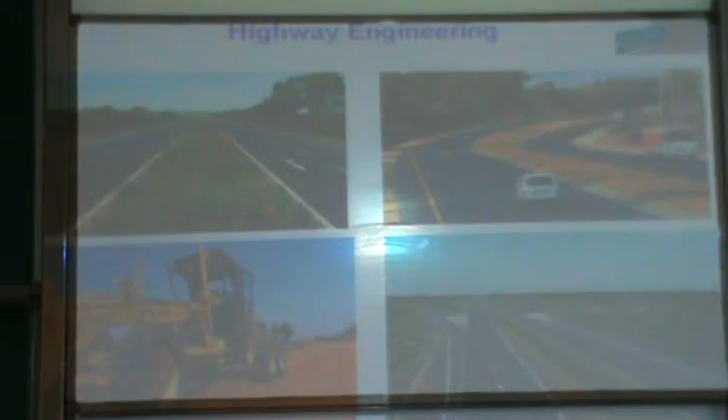So when you really look into reducing these road accidents, you can see that we can design highways as per international standards or our Indian Roads Congress standards. This picture shows a well-laid highway by our National Highway Authority of India. We can see that this highway is divided, a two-lane highway with dividers, and the divider needs a lot of horticulture work. When one goes through this highway, one can have a pleasant drive plus an accident-free journey.

Also you can see there are no cutting-in marks in between, so there is no chance for people to take a U-turn on this particular highway unless there is a designated U-turn. So this highway is a kind of civil engineering structure which ensures full safety on the roads. If you really look into this highway, it is already finished, but its horticulture aspect in the median is lacking, though it's still under development.

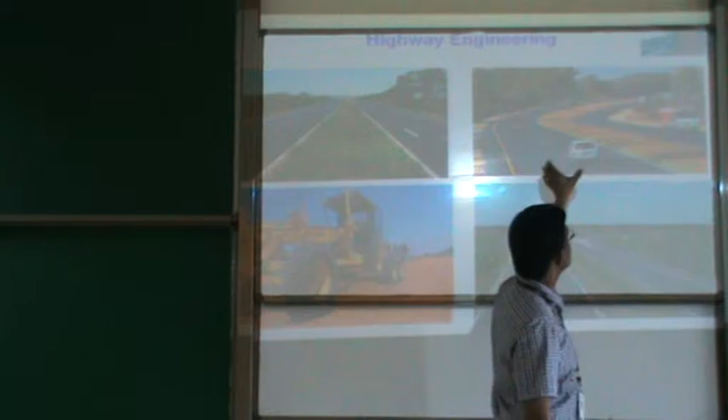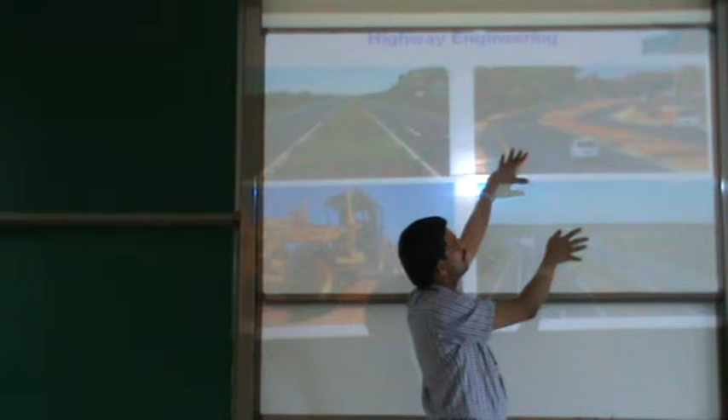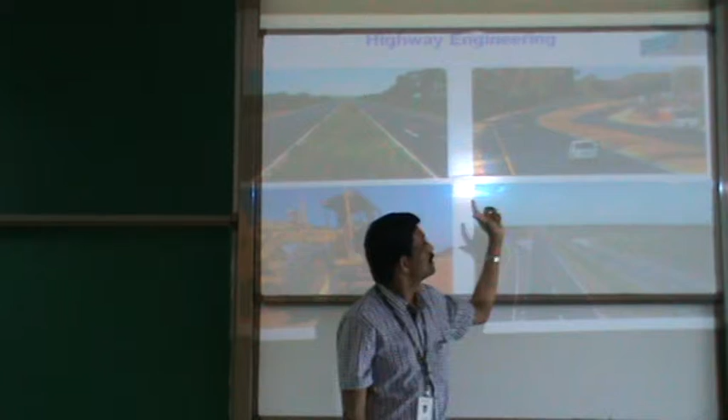But you see that the highway is taking a particular turn. There is a lot of science involved behind this turning, because when a vehicle takes a turn, it will be subject to centrifugal acceleration and the vehicle will be pulled away. So you need to design this curvature with banking on the roads, which you will deal with in detail in later classes. My scope in this particular lecture is just to introduce what aspects need to be thought about. In this curvature, the design depends upon the speed of the vehicle on this highway.

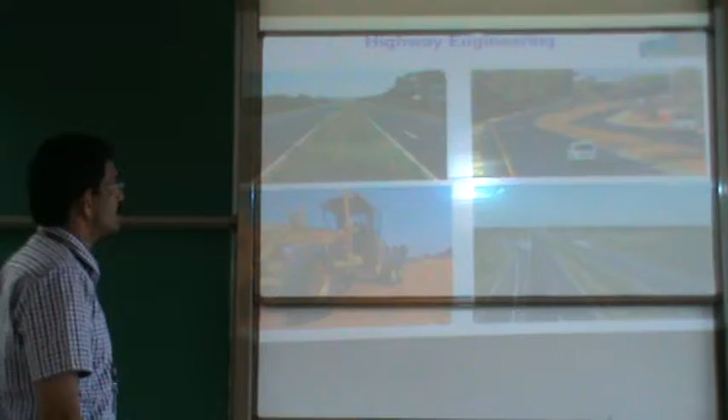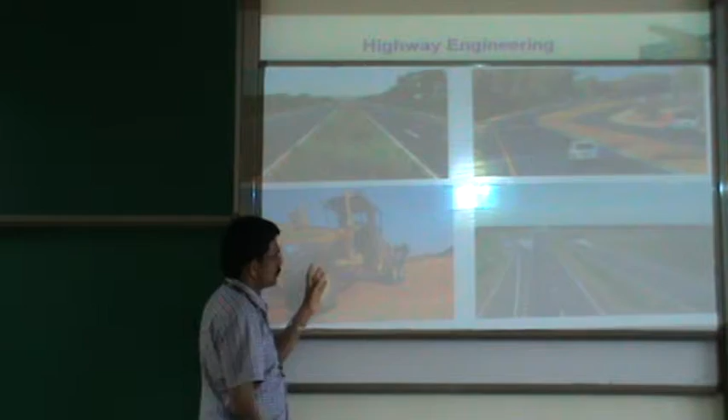The more the speed, the more radius of curvature you need, so that an accident-free negotiation of the curve is possible. If you look into this picture, it shows what kind of equipment is to be used, hired and employed with optimization, so that the highway project is constructed with a lot of economy and time saving involved. These are some of the aspects a highway engineer needs to focus on.

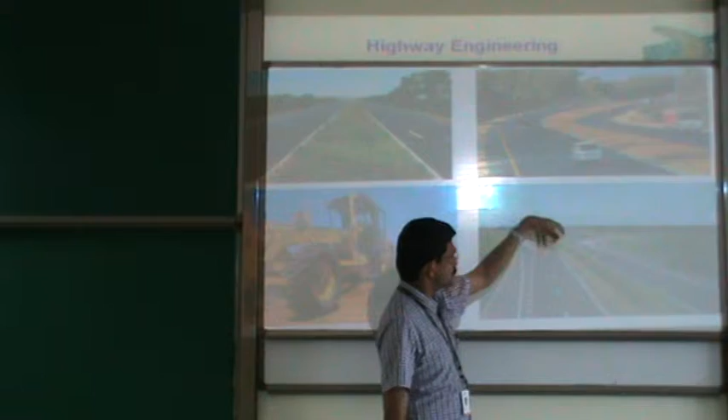Here is another finished highway. You can see that one highway is coming directly to this main highway, and another one is probably bifurcating. When you have such kind of diversions, how you design is very important. You need to have proper channelization, proper marking on the highway, and also you need to put street lights. The spacing of street lights is very, very important, because if the street lights are not properly laid out, that can also lead to accidents.

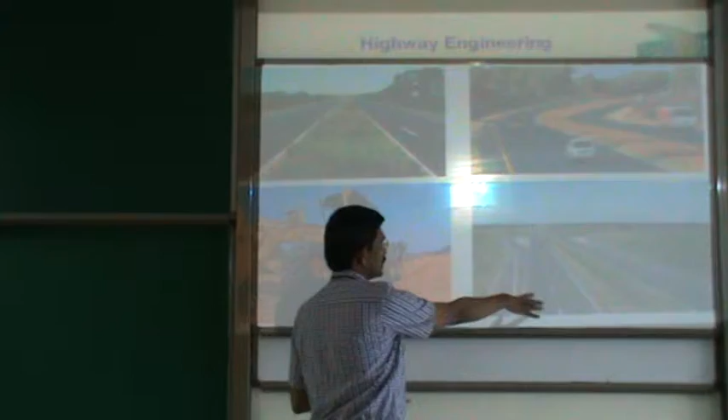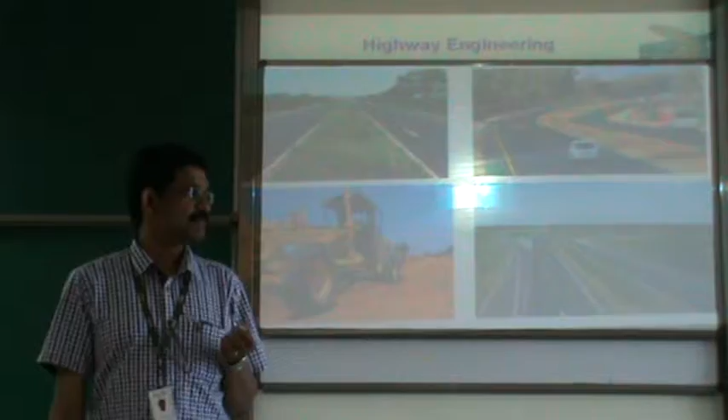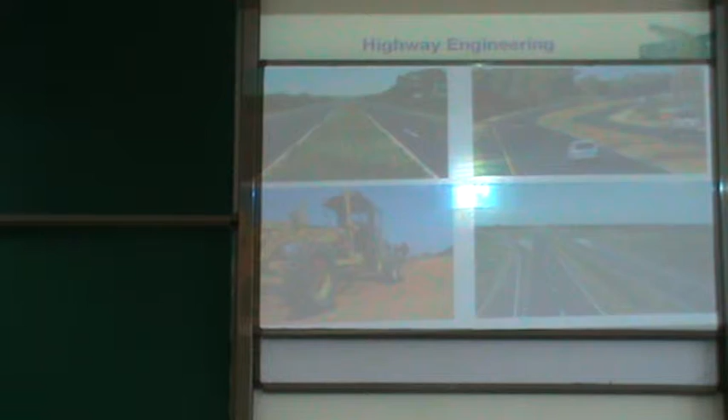The recent budget allocated around 70,000 crore investment to infrastructure. Some major part of this money is going to be used in the highway and transport sector. Investment is there right now, so engineers need to really work hard and make our highways and railways safe and comfortable for passengers to use.

Now this is a grade separator. We can really see when more number of junctions come at the same level, we can already experience a lot of traffic jams in day-to-day life. We can avoid such long queues of traffic jam by designing a proper grade separator. This is a very complex grade separator, but you can see free flow of traffic in all aspects, in every direction.

One advantage is that while avoiding such traffic jams, we save a lot of fuel and reduce pollution. Ultimately it will increase the health level because it avoids wastage, and people's health won't be affected since there's no idle condition for vehicles to stop at a junction and pollute more. So this kind of investment, when you look at life cycle analysis or long-term basis, brings a lot of goodness to society.

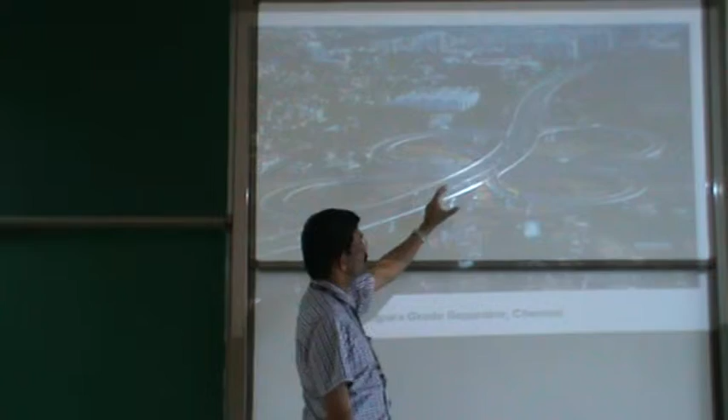In our locality, Chennai itself, you can see the Kathipara grade separator well laid out, and I witnessed how much traffic jam was there before the installation of this flower-shaped grade separator in Kathipara. Now you can see free flow of traffic. Chennai is considered one of the thickly populated cities, and you can see vehicles freely moving. Those who want to go to the airport also face absolutely no congestion. So this kind of structure is more and more easily deployed in highway engineering design, in many parts of our city or elsewhere.

This road paved density is very important for the development of that particular locality because connectivity is very important. If connectivity is more, industrial output would be more, agricultural output would be more, and healthiness would be more, because people can reach hospitals and other places easily if road connectivity is high. So there is a lot of scope for other states to improve road connectivity.

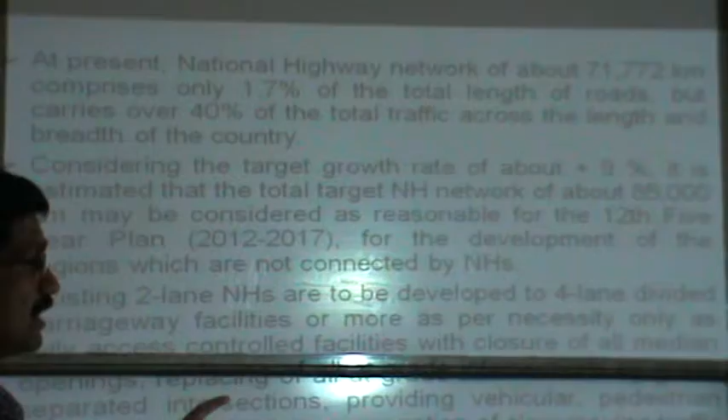Such national highways have to be there, and the percentage of length has to be increased. Considering the target growth rate of over 9% in our country, in the 5-year plan the government is anticipated to increase road length from around 71,000 to 85,000 kilometers. They also want to upgrade existing 2-lane national highways to 4-lane highways, and we need a good number of grade separations like Kathipara, along with proper pedestrian and cattle crossings, since most roads currently lack proper pedestrian traffic flow.

For pedestrians to travel comfortably and safely, we need to enhance the capacity of the road in such a way that vehicles can move very fast, while at the same time pedestrians can cross safely and walk on the side of the road safely. We also sometimes need to segregate slow moving traffic by providing service roads or alternative connectivity wherever required.

These measures are all from a road safety point of view, so that deaths on roads go down substantially, because India is at the forefront of accidental deaths happening on highways. We need to reduce this substantially. So civil engineers, especially those specialized in highway and transportation engineering, need to play an active role to realize this dream so that our death toll goes down.

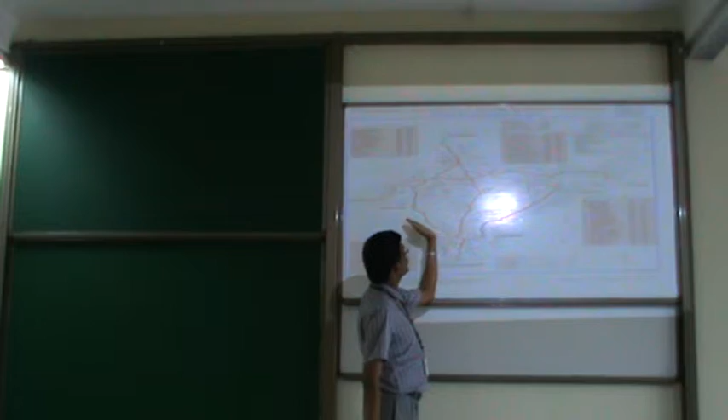If you look at it, there are 7,000 kilometers of coastal line in India with many major and minor ports. The major ports are now connected, but we need to connect more minor ports and link them to the major roads. So the government is planning to invest more into these link roads, and also connect state highways and national highways with the well-established major roads, so that traffic flow from one point to another is fast and safe.

Now again in the budget, our finance minister has allocated around 70,000 crores, out of which some money is to be used for public expenditure, so that the PPP model can be further triggered and this deal reaches a higher level. This decline was happening because there were a few players bidding for BOT - build, operate and transfer - projects, and financial capability came under stress after implementation, because viability became a question. Also, banks were not ready to give finance in certain cases.

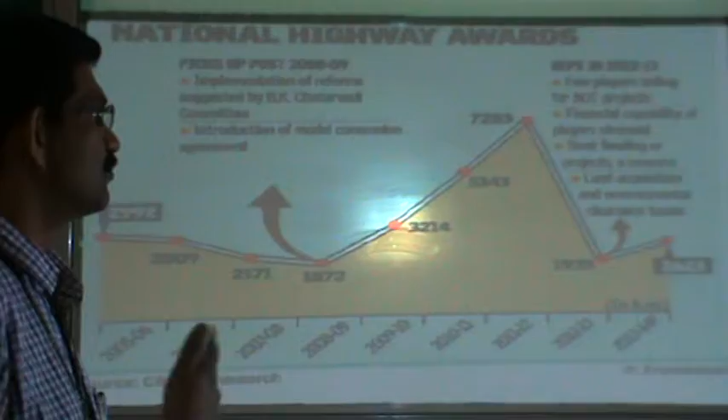In other cases there were issues with land acquisition and environmental clearance. Nowadays, the government is again pushing forward reforms so that the time taken for clearance is reduced, so that infrastructure can be improved in speed and installation, money flows more easily, and the processes involved in clearing projects are simplified. We hope to see more wider highways with good engineering practice in place in our country in future.

Now let us look into transportation engineering, which is the umbrella under which all modes of transport come, including highway engineering. So what is meant by transportation engineering? It is the application of scientific processes, involving observation, analysis and deduction, to the planning, design, operation and management of transportation facilities. It is a very big area that involves all modes of transport like roadways, railways, waterways and airways.

It involves a lot of science, and you need to really do a traffic survey in either mode of transport. You do the survey, then you need to do the analysis of the data you collected, which will be used for planning, designing and execution of the project, whatever the mode of transport, whether roadways, railways or waterways. You need to go and do a survey to collect the demand for traffic.

After collecting the data, you have to go for alignment of this particular route, and decide which cities are to be connected, which areas to cover. All those come as part of the survey and demand, and you need to go to the field and fix the alignment. I am not going into the details, as those would be dealt with in much more detail in subsequent classes.

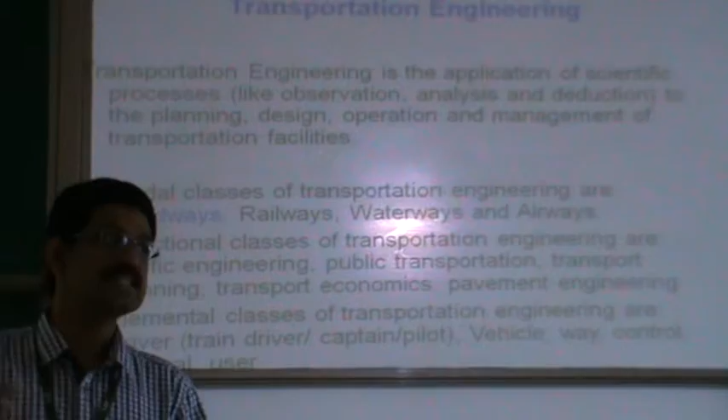My job in this class is just to introduce, under transportation engineering, what all the scope is. For example, transportation engineering could be divided based on class of transport as roadways, railways, waterways and airways, and also based on function, transportation engineering can be classified as traffic engineering, because traffic engineering involved in road traffic is different from air traffic, which is different from rail traffic.

Transport planning also comes under this, because it involves a lot of planning, surveys, collection of data, analyzing the data, and planning it. Then after you decide what kind of transport infrastructure is there, you need to invest a lot of money. So how do you finance it? That leads to transport economics.

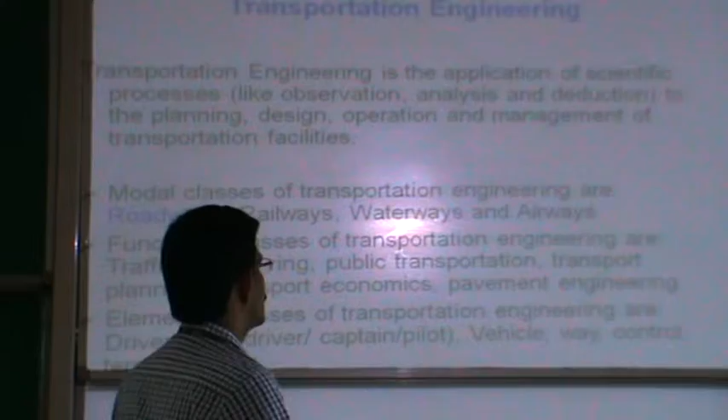Once you have the alignment and you have money, how are you going to do the pavement? So you want to do pavement engineering, which involves either a flexible pavement or a rigid pavement. These involve a lot of civil engineering and structural engineering, including soil mechanics details, so that one can do a correct way of pavement engineering.

Another aspect of transportation engineering is the element class of transportation, which involves the driver, because driver psychology and reaction times are very important in traffic regulation. For example, a train driver, a pilot, or a road transport driver - maybe 2.5 seconds would be an average reaction time.

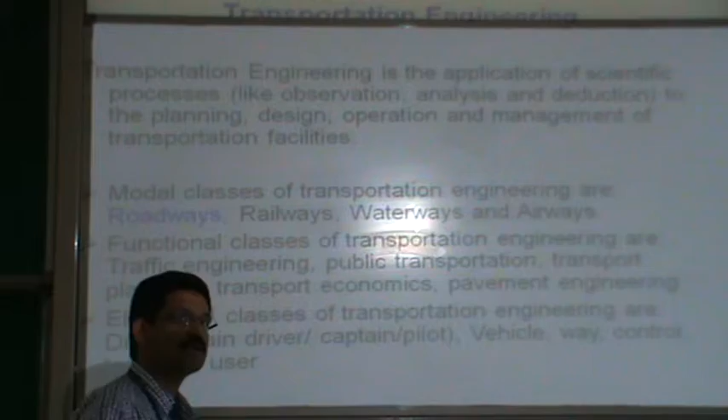When one applies a brake on the road, the vehicle may travel around 20 to 30 to 50 meters before stopping, depending on the speed. Whereas in a flight, it will be much different - the reaction time, the pilot will travel much longer distance. So driver psychology and reaction time are very important.

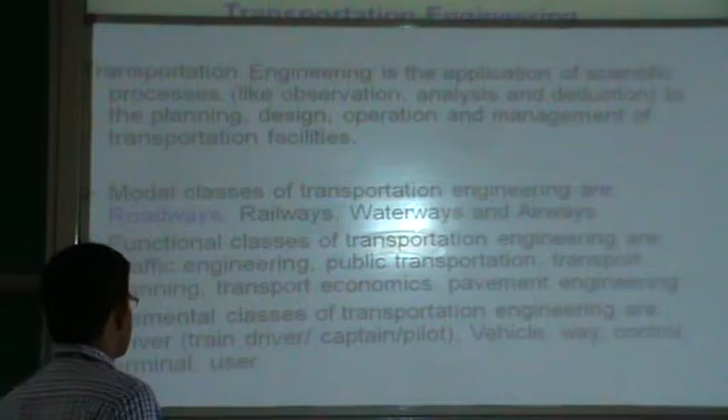The vehicle - what kind of vehicle is used in transport, whether it's a train or a car - depends upon that, there is a variation. Then where the path in which the vehicle is moving, the movements, then what is the overall control of the vehicle, then what are the terminal facilities - these depend upon the need and demand.

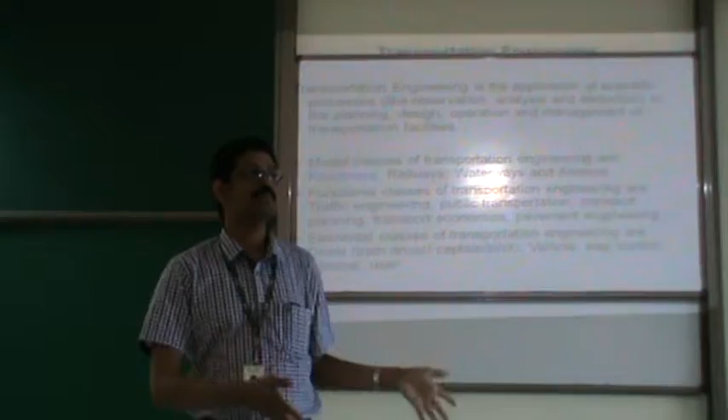Then the user - what is the user psychology - that also becomes a part and parcel of transportation engineering. Because sometimes whatever facilities and terminal things we design in one city may not be applicable in another city. So we need to look into the user psychology and take that into planning and design.

So let us have a brief introduction about all those four modes of transportation engineering. Let us see the roadways. All vehicles use the roadways to travel from one point to another, including automobiles, trucks, buses, cycles, bullock carts, trams, etc. Depending upon the use of this vehicle, you need to design the road.

For example, you need to take a slope of the road - how much gradient you can put in the road depends on the kind of road usage. If a bullock cart is being used, you cannot have a steep gradient - it depends on the use. Also, if a military vehicle is passing through the road, you need to design the road for taking heavy load. So depending on the category of the vehicle and its use, you need to design the gradient, the pavement thickness - all those factors depend on this.

You can also have different kinds, like the intercity road or bypasses, which will offer very high speed but have limited accessibility. Whereas a village road will have great accessibility but low speed. Speed and accessibility have an inverse relation - expressways will have higher speed, whereas local roads will have lower speed.

So accessibility, local roads will have the highest accessibility compared to a national highway. This aspect needs to be considered, and each road has to be designed as per code provisions. In India, road design follows the Indian Roads Congress codes, which need to be strictly followed to ensure a safe and comfortable journey.

This figure shows the relation between one city and another, connected by an arterial road or state highway with very high speed, but low accessibility. When you go to a collector road, you get medium speed and medium accessibility. When you come to village level roads connecting agricultural or industrial activity, those roads have greater accessibility but lesser speed. This is something one needs to consider while designing and constructing roads.

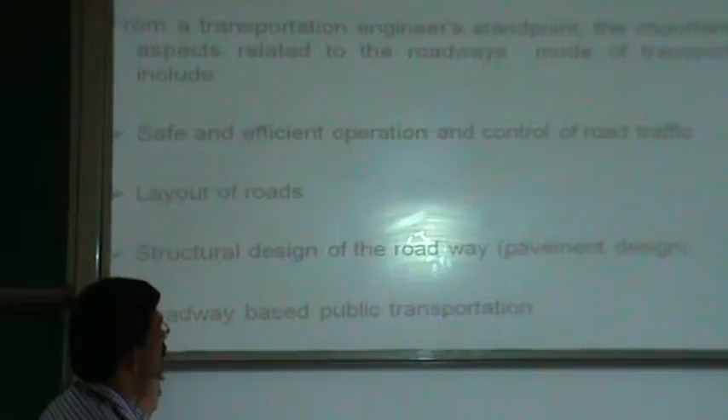From the transportation engineer's standpoint, the important aspect of roadway transport is ensuring safe and efficient operation and control of road traffic. You should have proper layout of the road, enough sight distance for stopping or overtaking vehicles, the right gradient so the engine won't get overloaded or stressed, and a proper traffic control and signal system for safe and efficient operation. Roads should be laid out so connectivity is maximized and economy is optimized - these are the two key functions, including safety and security through the road.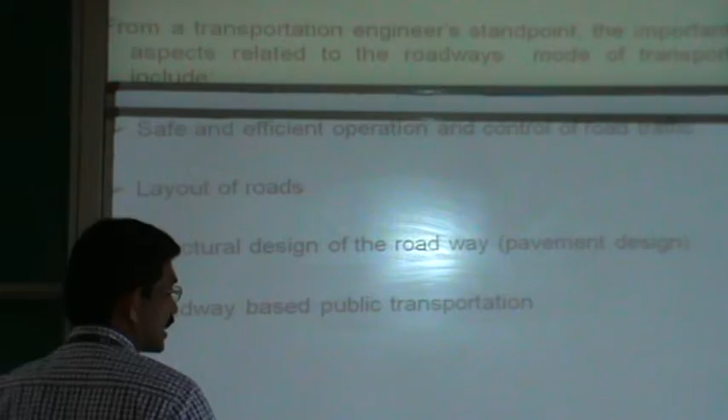Once that is done, you have to go for the structural design of the roadway, or pavement design. You can use either a flexible pavement or a rigid pavement. This depends on the terrain to which the road is being laid, the soil conditions, and the water table - based on these you take a decision.

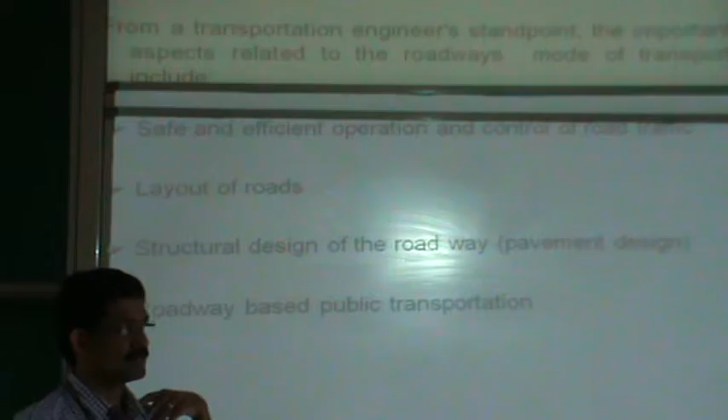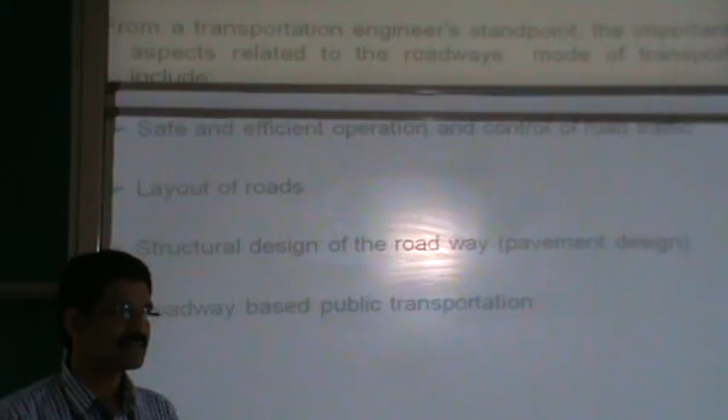Now, consider roadway-based public transportation. Sometimes the major aspect of public transportation is through roadways. You need to design a good number of bus bays, bus terminals, and service roads - all these need to be planned when looking at roadway-based public transportation.

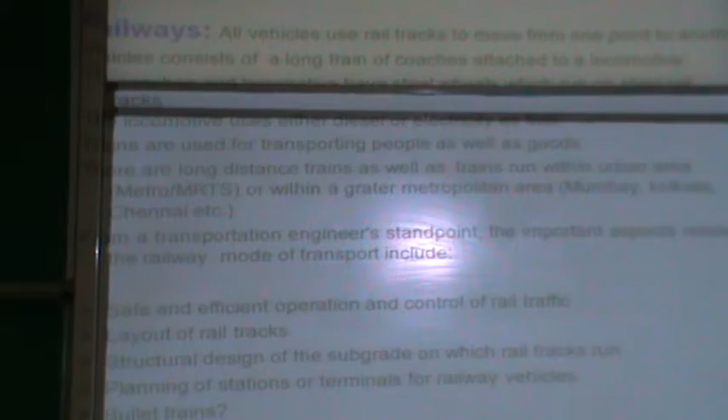When you look into railways, a locomotive pulls many coaches, which could be passenger coaches or goods coaches. In India we have different long distance trains and local trains, and especially in urban areas we have metro or MRTS, mass rapid transit systems. In a greater metropolitan area we can have more local trains - this applies to Mumbai, Kolkata, Chennai, etc.

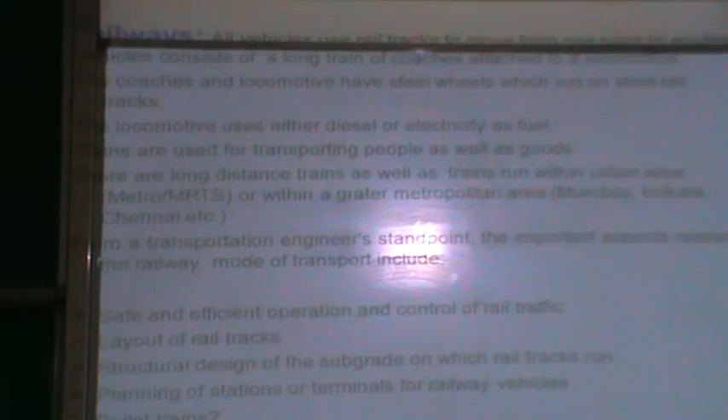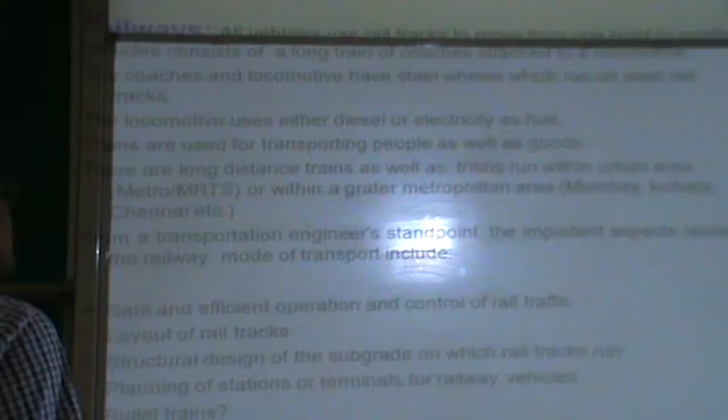When you look into railways, safe and efficient operation and control over rail traffic is a must, and nowadays train accidents in India are increasing. So the government has put a lot of money into improving the safety of rail traffic, and transport engineers have to design the railway track and traffic system so that trains can pass without accidents.

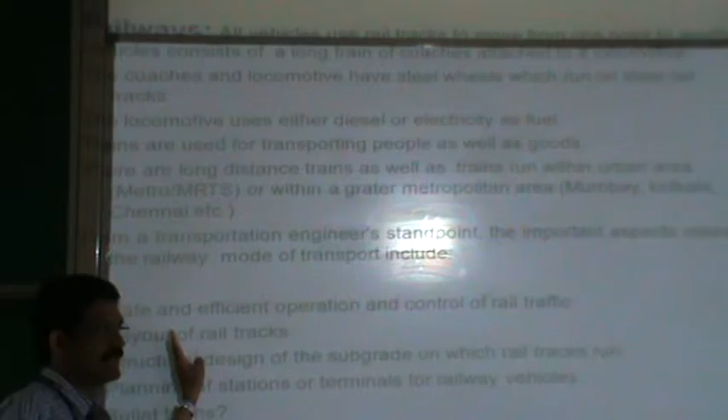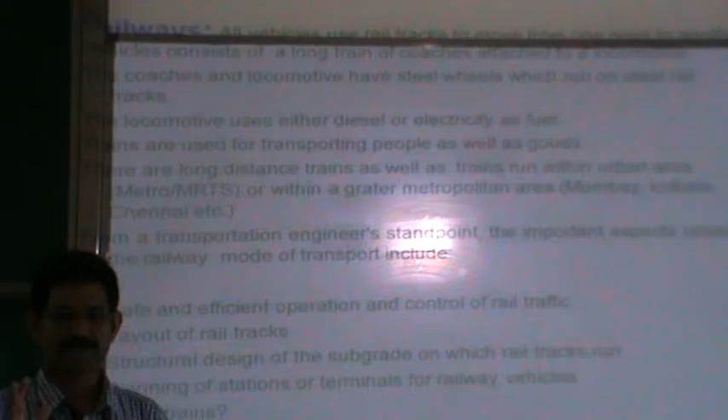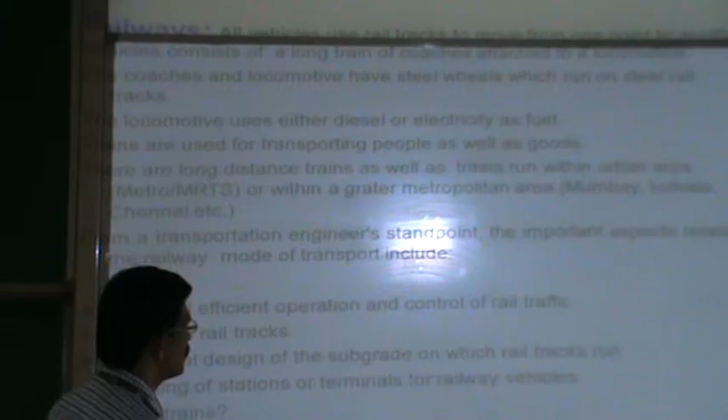Layout of rail tracks is also very important, just like highway engineering - the curvature radius when a rail track is turning, and each rail design for a particular locomotive depends on the speed at which the locomotive goes, the railway track capacity, the foundation, subgrade, ballast, and other structural members that need to be designed accordingly. You also need to plan the number of terminal stations and other yards based on operating aspects.

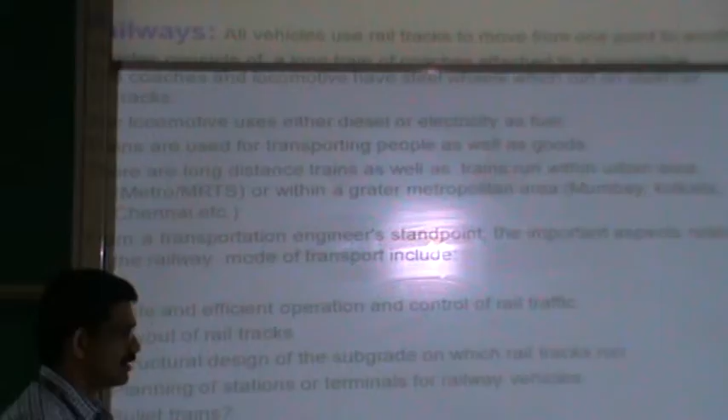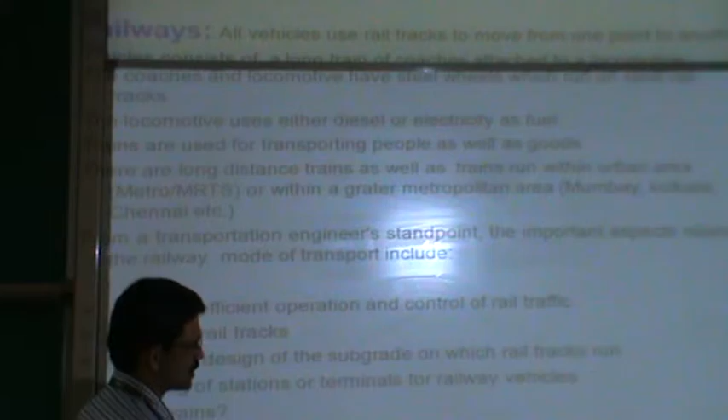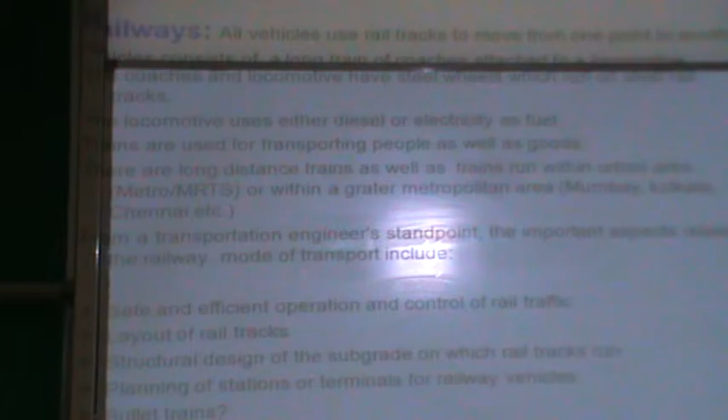In future we are planning bullet trains in India, so we need to design them differently from our current express trains. This involves a lot of engineering, and we need to upgrade our skills to design tracks that allow a train to go at 200 or 250 kilometers per hour - the tracks we have now are not sufficient, so we need dedicated tracks to allow such arrangements.

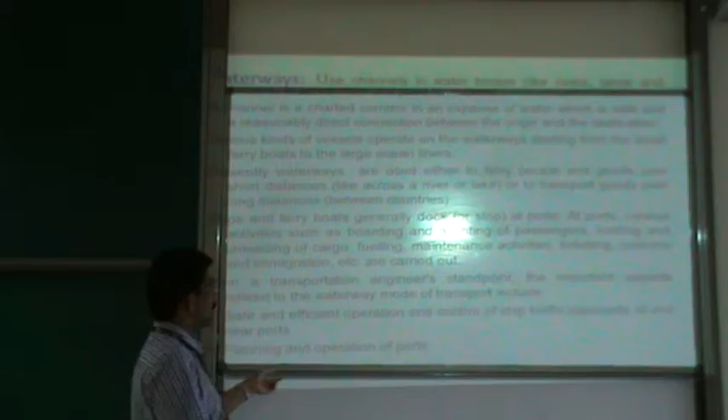When you look into waterways, there are dedicated corridors for passenger ships, boats, or whatever vessel is going. These also come under the purview of transportation engineering - it's a charted corridor in water which provides safe and direct connection between the origin and destination.

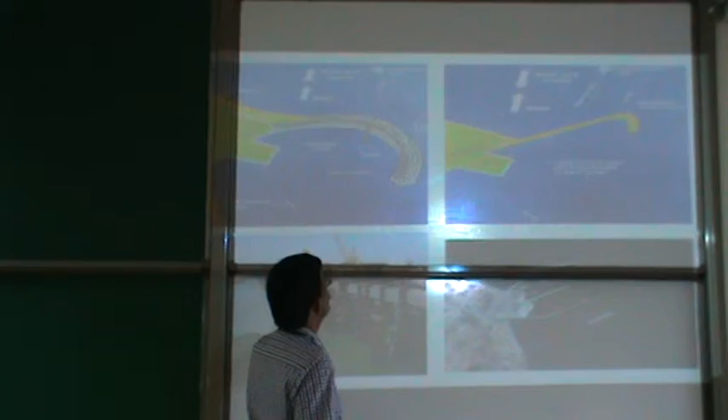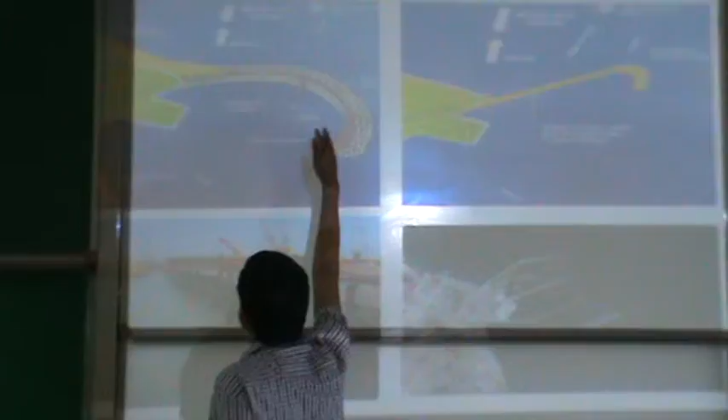This shows some civil engineering structures where you need to take care of the tidal effect and wave effect so that when a ship is embarking, it should not get disturbed. Civil engineers need to play a big role in surveying the tidal and wind effects, then constructing proper man-made structures to protect port vessels from adverse tides so that port and harbor activities can be safe.

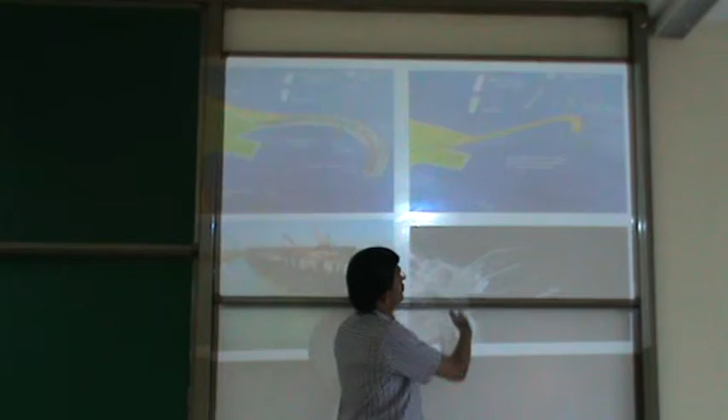This shows some examples of how man-made structures protrude into the sea and how channelization happens so that port and harbor activities can proceed.

The last one I want to introduce in transportation is airways. Airport facilities and airway traffic also fall under transportation engineering. Like air also there is a chart path available for aeroplanes to fly. This chart path is designed depending upon the direct connectivity between one station and another station and also prevailing atmospheric conditions.

Normally flights fly at an altitude where the atmospheric condition will be conducive to minimum turbulence, so that the aeroplane will not be subjected to much turbulence and the comfort level will be maintained. That is why normally flights fly at around 30,000 feet.

And sometimes the operator will depend upon international requirements such as terrorism or other safety issues. So various kinds of aircraft may use this particular chart route, including single engine planes to large jet aeroplanes.

Air travel is considered one of the fastest and safest modes of transportation because even though we come across many accidents in the aviation sector, the frequency is very less compared to train and road accidents.

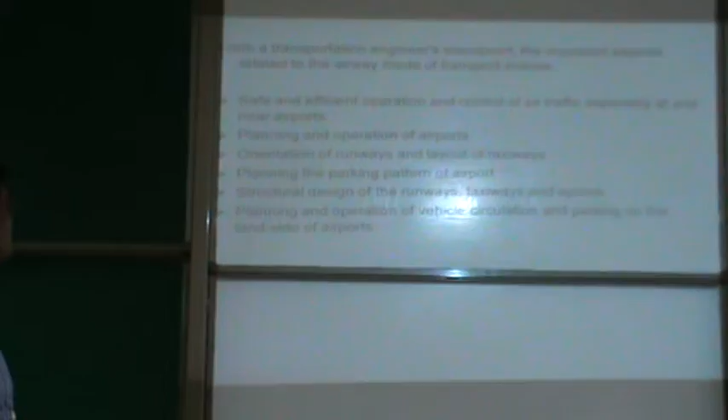You have to ensure safe and efficient operation and control of air traffic, especially at and near airports. You need to do the planning and operation of airports, including traffic regulation, orientation of runways and layout of taxiways. This is very important during the planning stage.

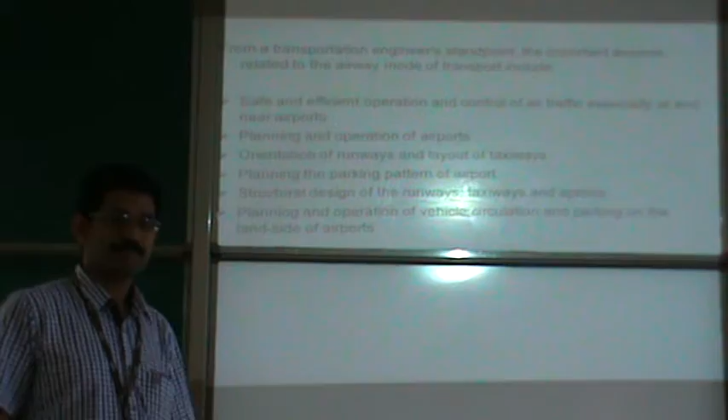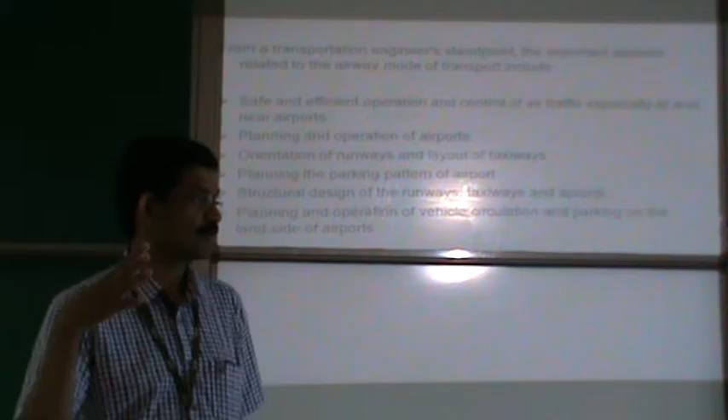You need to do a survey regarding how the wind flows in your airport area, taking into consideration the wind rose diagram of that particular area, and what buildings and infrastructure exist in that area. Based on that, you design the runways.

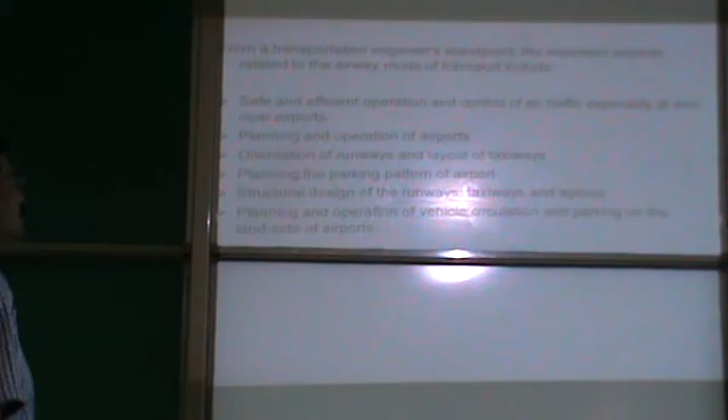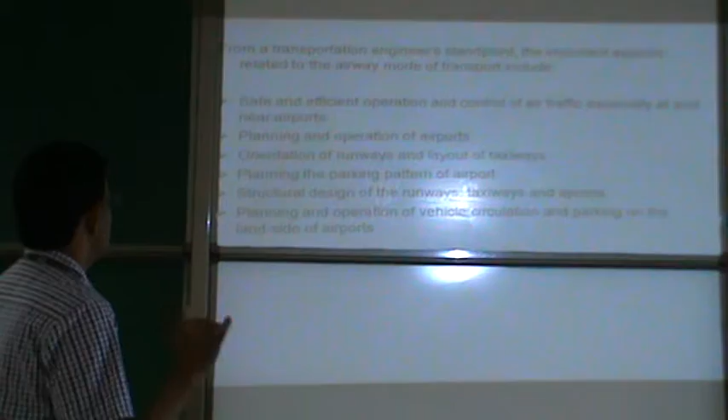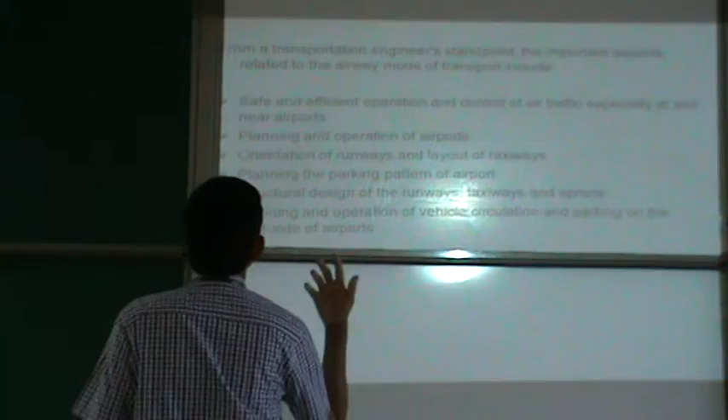After the runways, you have taxiways to take the aeroplane to the terminus. You have to properly plan and design this so that free flow of traffic is ensured. Then you plan the parking pattern of the airport, like how many flights will be coming, and how you will disembark or board passengers.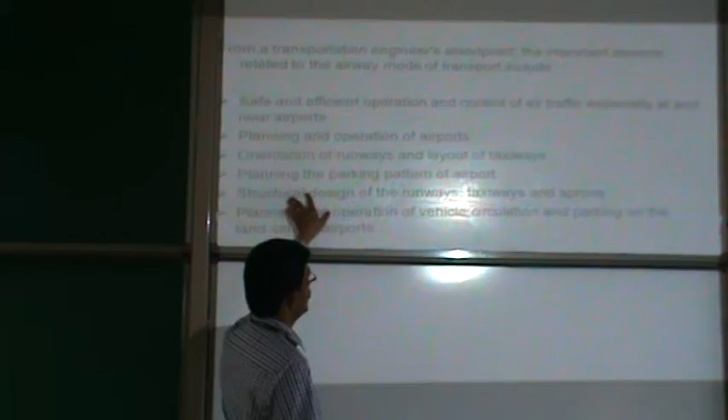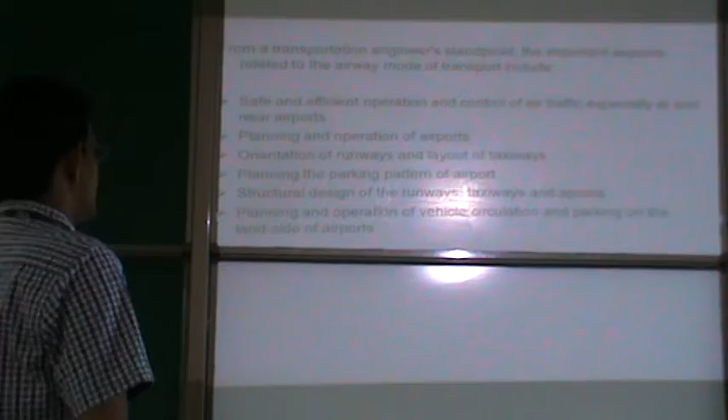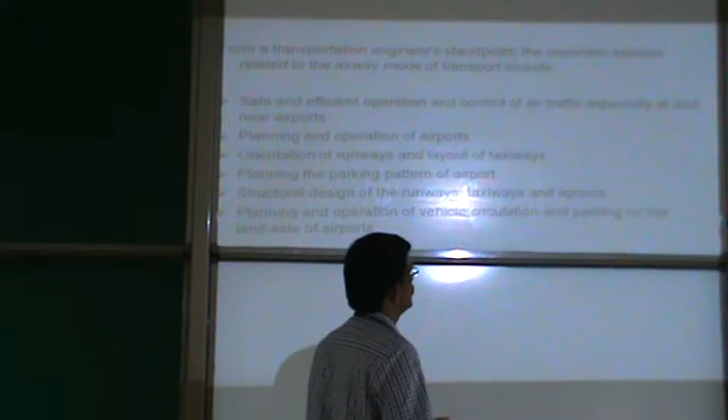Many facilities are involved. We need to design taxiways and aprons so that they get the flight or aeroplane off fast, and it should be stable. Then you should finally plan and operate vehicle circulation on the land side of the airport.

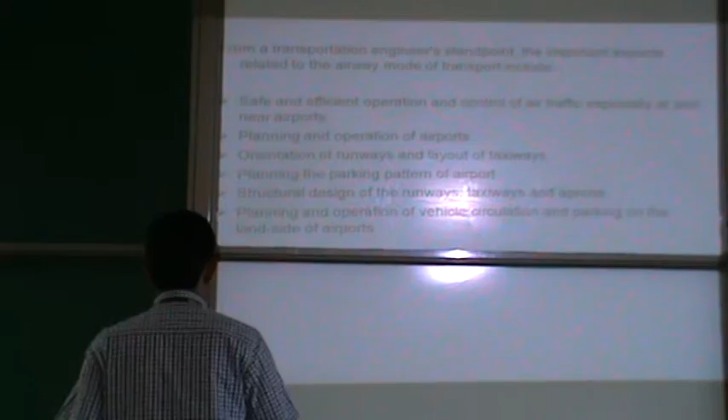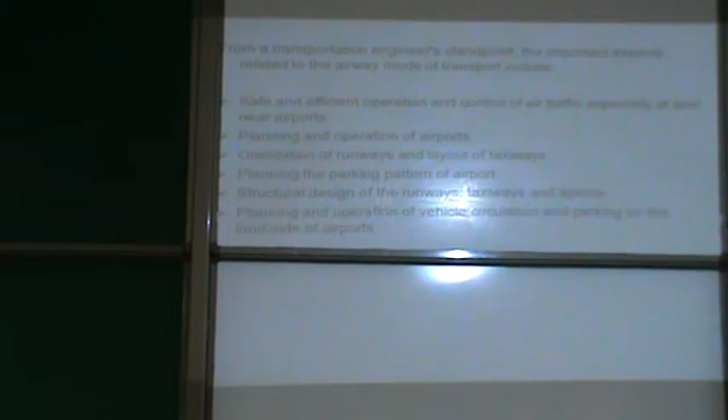A lot of cars and other vehicles will be coming and waiting for their passengers. So you need to design good parking facilities outside the terminal so that airport operations are not affected. All this comes under public transportation.

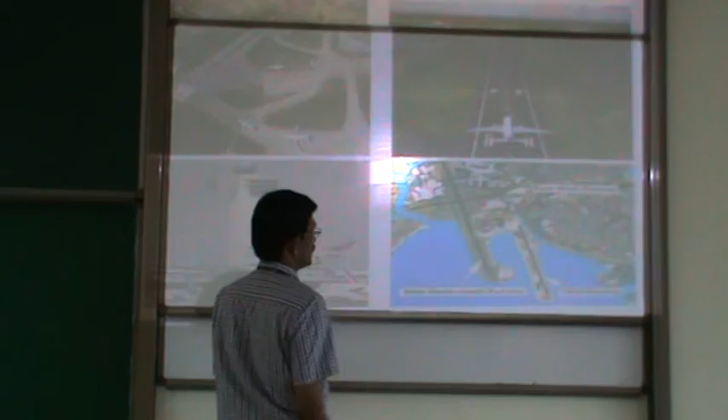Very recently in India we cannot face that kind of situation, but maybe after a century or so, one may have to build airports in the sea also, just like that.